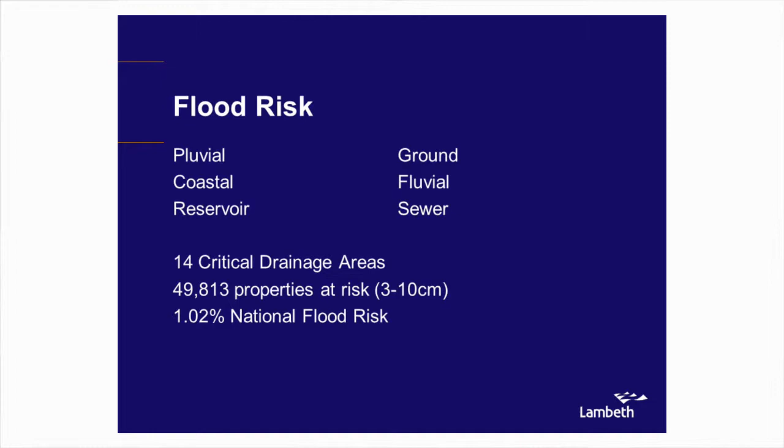We have identified through Drain London 14 critical drainage areas. Working on the map for surface water flooding, the Drain London outputs is about 49,000 properties, or 37% of properties in the borough. And on the DEFRA new burdens funding, we hold just over 1% of the national flood risk.

15% of our land use is public highway, and 17% of land use is green space and parks. So we have some option to do something, and that's the angle I'm looking at.

But first of all, I need to blame people, because politically I need to justify why I'm spending this over sewers. I can blame our friends at Thames.

It's all well and good David saying 1991, but it goes back further than that. The loss of front gardens - well, obviously I can blame my residents because they're being selfish with their vehicles and wanting to park on their front gardens and concrete them over.

Removal of grass verges, I put the 80s. We had some people who decided that concrete and asphalt was the way forward rather than grass and nice soft fluffy things.

Traffic calming, I put new Labour, so I'm just jumping on the bandwagon. Traffic calming to me was a massive success through the 10-year targets, and it was met and exceeded. It was great - we don't celebrate it enough.

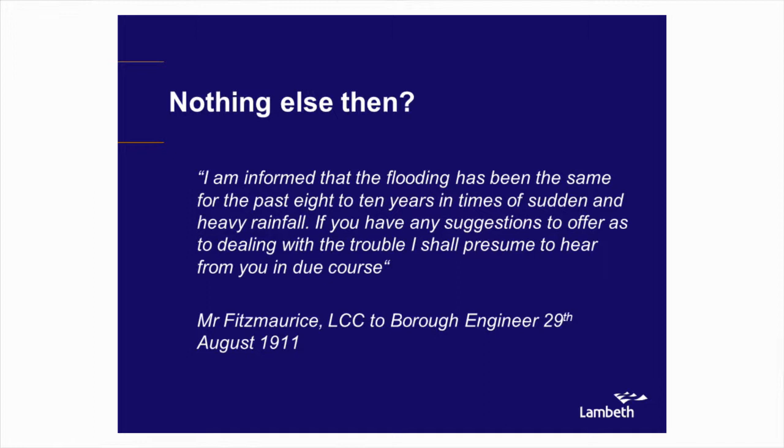Unfortunately, this was 1911, and that same problem still exists. So we haven't moved forward, and that was the old London County Council, which by definition is now Thames Water on the sewage side.

So I'm going to run through some schemes and what we're looking at. One thing I'm very keen on is maintenance schemes. We do these as bog standard - these are bread and butter, standard practice - we all have standard set designs of what we do in our roads.

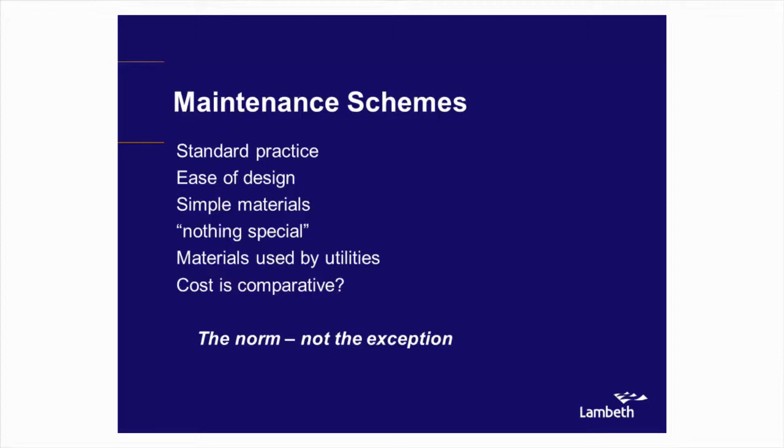We use straightforward materials, whether it's asphalt or small modular paving, and obviously they're materials which are identified and used by utility companies within the SROH. The cost is comparative - there's nothing special, it's the norm, not the exception. So we're not talking these lovely posh granite schemes, imported from China or wherever else it may be fashionable to import from.

So it's straightforward. Here I have Central Hill - planned maintenance to do the footway. It's on the principal road network, so it's an A road - gritted, bus routes, the usual sort of stuff.

Runs next to a park. We separate the public realm because that's what we like to do - there we have a park, there we have a highway, and never the twain shall meet. We have our crossfalls into the road for all footways, or the majority of footways are designed to fall into the road, and there is a little bit of a groundwater issue at the top of the hill.

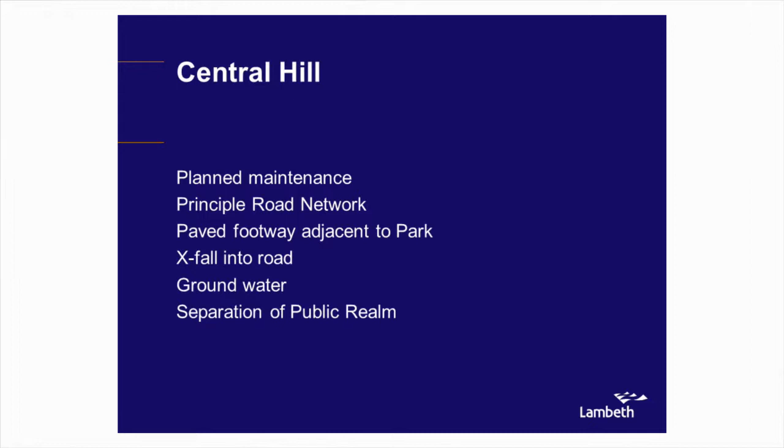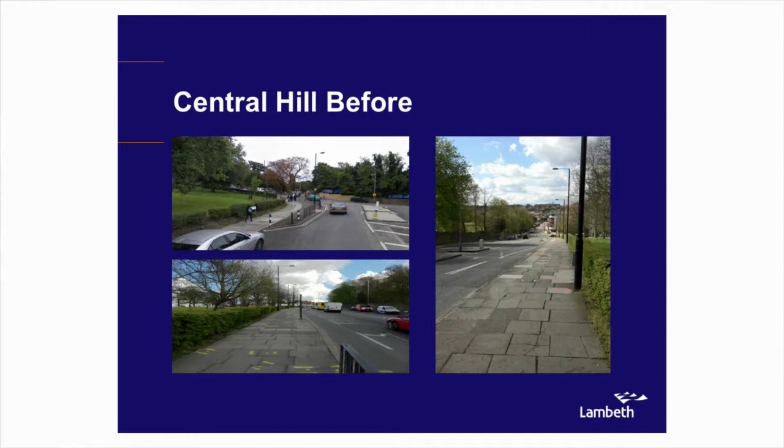So here we are. The top left is Ardlui Road at its junction with Central Hill. As you can see, a nice typical build out, guard railing, three different types of bollard I believe, and pretty much clutter - bog standard asphalt. The curb would have only just been chased into the existing carriageway, so the existing carriageway surface is still under that build out. The bottom left is looking up Central Hill, and the top and the right is looking down Central Hill, which is roughly where the groundwater issues are. They come out at the junction called Salters Hill.

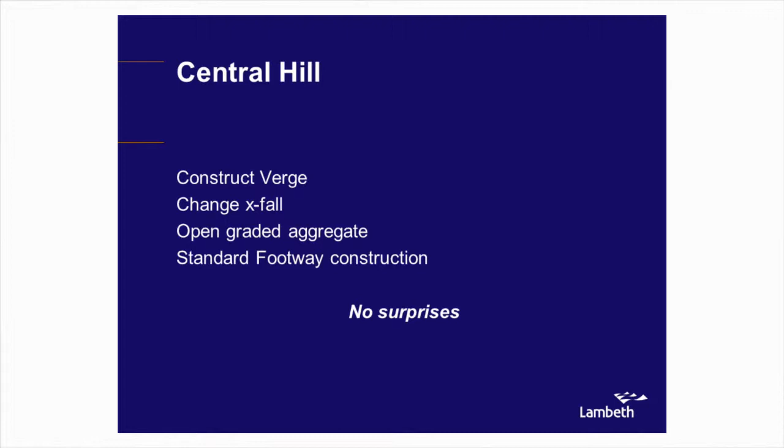The verge I've constructed, I've gone down 400s, I've used 200 of open graded aggregate. The reason I decided on that was purely because it's a material utilities use, or utilities can easily get hold of, so there's none of these arguments about, well, it's a special material, you need to provide it, etc. And the rest of it is just standard footway construction. It's nothing special.

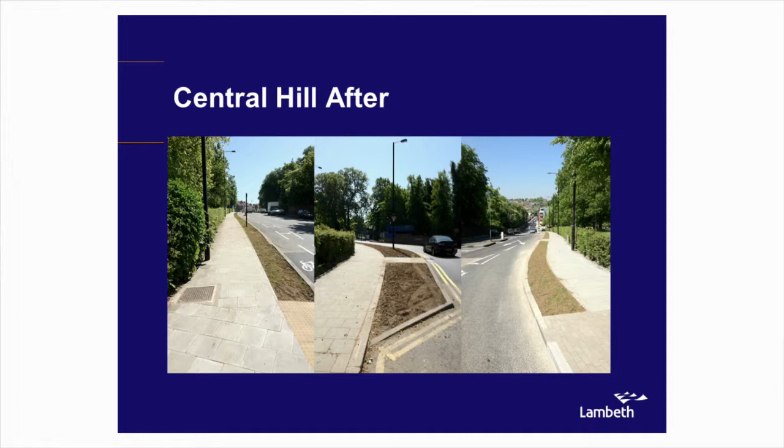This completed in May, and we've realised that I've made some mistakes on it. It's not perfect. We didn't realise there was an overrun issue, not on the build-out, but looking up the hill. Apparently Chelsea tractors like to park there, but there was no evidence on the old asphalt that people were parking up because it wasn't crazed or cracked.

We also didn't put any check barriers in - in retrospect we should have, and possibly a cut-off drain at the bottom of the build-out. On the grass verge and overrun, obviously the initial reaction of people at work was, well, we'll put bollards in, or we'll do something, or we can raise the curbs, and it just kind of loses the whole appeal and the object of what a grass verge is.

So Hydro are kindly humouring me at the moment, trying to find a solution of a possible grass verge which you can overrun without much damage and not using grasscrete. I know, I have a lot of aspirations.

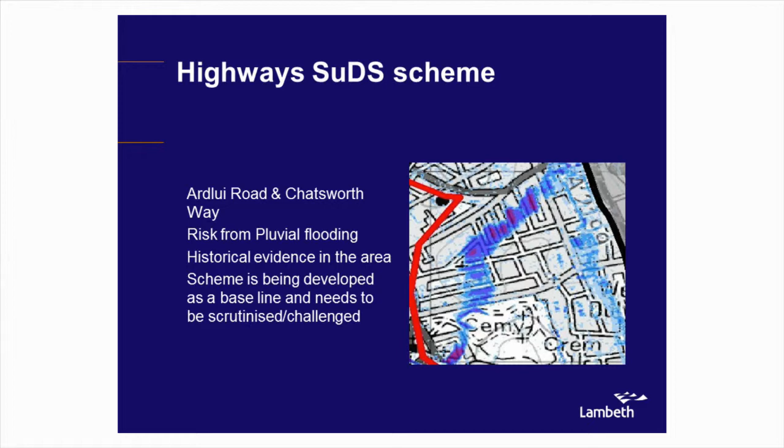It's a highway SuDS scheme we're doing. This is the one Steve Wilson mentioned. We picked two roads, or we're looking at two roads, Ardlui and Chatsworth. They're in that little triangle where the church is, or the cross is. And you can see the modelling, this Drain London output, that there's a pluvial risk, but we do actually have historical evidence in that area of properties being affected by surface water flooding.

It is being developed as a base. We are going into quite a lot of depth and detail on it and trying to capture a lot of detail. As I said, Steve's working on it. We've got URS who are working on the modelling and will write up the final report. And I've also commissioned Sustrans to lead on the community engagement.

So there's Ardlui. There's no frontage on Ardlui as it is. As you can see, it's just a road, but it's a dead space.

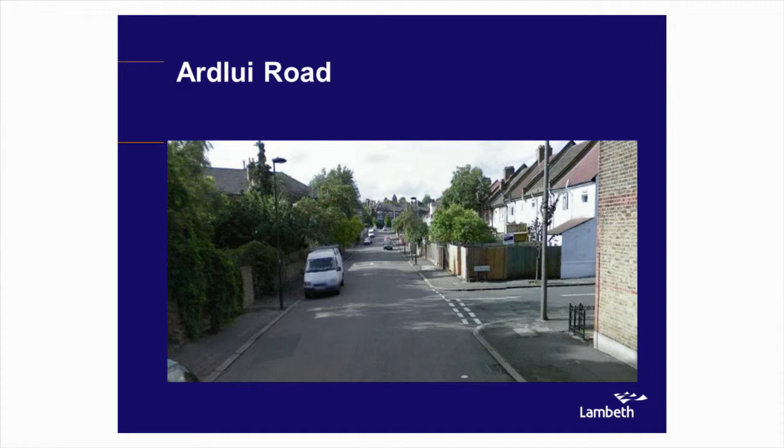Nothing much goes on there. So how do we bring that back into the public realm? Because that's what it is, public realm.

This is what Steve's kind of designed initially off the topo. The red lines are the build-outs Steve's put in, about 19 in both roads, which if we go for option 2, which I'll explain in a minute, it's probably about 50,000 litres.

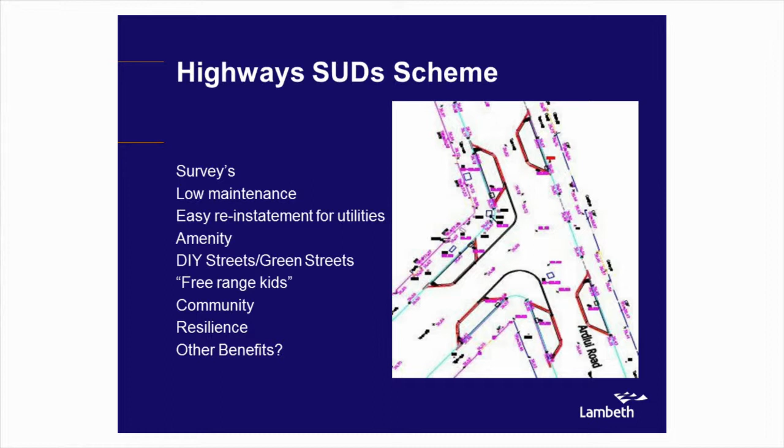It's got to be easy reinstatement for utilities because we don't want it ripped up. It's got to be low maintenance. Amenity is essential. Although these are more for extreme events, we need them to be spaces which can be enjoyed and part of. I've put it down as free range kids, which is a Sustrans livable neighbourhood thing. It's about kids enjoying the street again, playing footy out in the street like I used to, or trying to kick it at cars driving at you.

And we want to kind of bring in the Green Streets approach from Portland and the ownership issues from Seattle, and adopt a drain, hence Sustrans have this engagement process, which hopefully we can do. And it's going further on the resilience, looking to cut off downpipes, looking to depave front gardens and bring it back. So it's a door-to-door process, not fence to fence.

So I'm not solely keeping my eyes on the footway and carriageway. It's about space, it's about the community, it's about residents. We're trying to look at the property values, we're trying to look at health and well-being. How far we go with that, I don't know, but we're trying to get this data and break it down.

So the rain gardens, the size Steve's come up with, I said the size of the parking bay, because that's the size everyone can deal with. Everyone understands the size of a parking bay. So he's kind of doubled it.

This 5% figure is only a figure that's come up in the last week. I discussed it a couple of years ago, but I would be happy if I could get a 5% reduction in runoff. Doesn't sound like a lot, but when you start building these projects up over and over the area and the borough, it starts adding up.

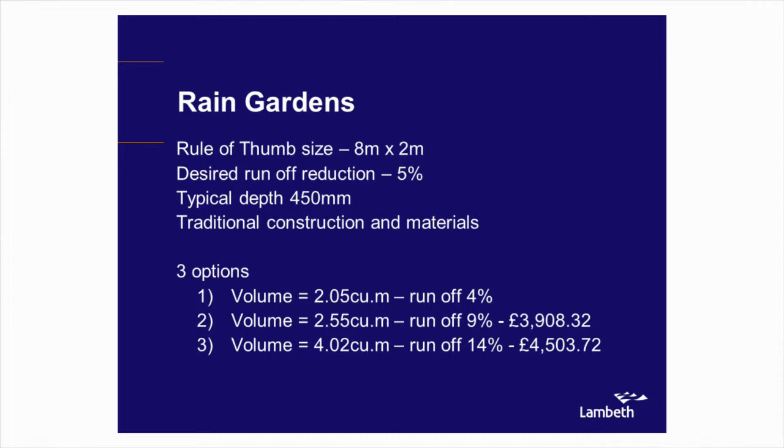And this is where the fun now starts, because option 3 is with the crates. It's got 4 cubic metres, as you can see, captures 14% runoff, and it's not that much more expensive. So now I'm getting into the realms of where do I want to go, what do I want to play with, and what is going to be more cost beneficial.

What happens if Thames Water come along and decide that they're going to lay their main there? Are they going to repair it? Do I have to store this stuff, etc., etc.? So we're beginning to get into the mechanics of the scheme. Here's another cross section, which is with the open graded.

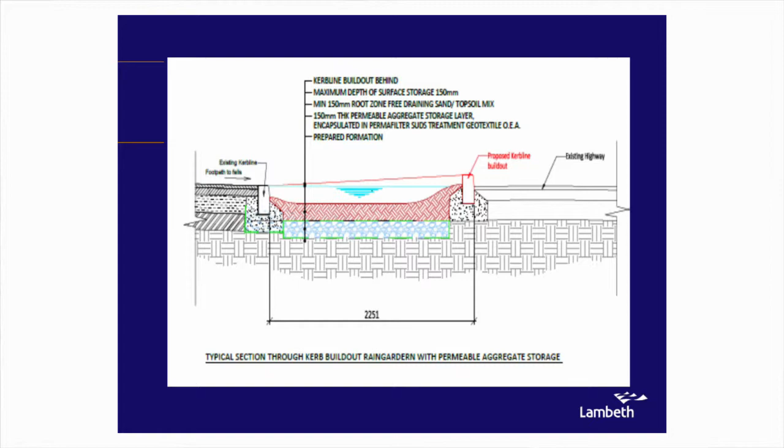Moving on, but going back to, we're looking to start consultation with residents, or engagement, in September. So hopefully be on site in February, or certainly if not, our contractors will dig a trial hole on the 31st of March. Ingleborough Street - this is a weird little stub end of road, as you can see.

I think this is our storage area for bollards in the borough—they run the whole length and no one knows why. We just know there are bollards there. This road services those properties on the right you can see in the photo, and that's pretty much it. Nothing much. Opposite is an estate, and there you go, a lovely bit of public realm—somewhere you'd all love to go, I'm sure.

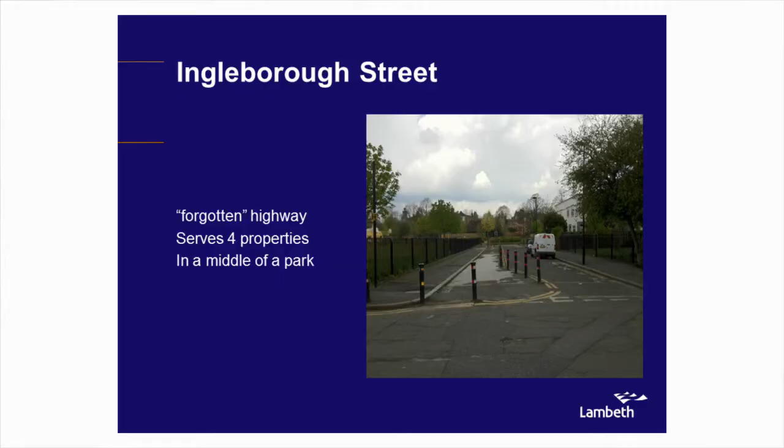On the left of the photo, you can see the two trees by the fence. What they're proposing to do is get rid of that grassed area and put in a hard standing football/basketball court area. And they thought, whilst they're going to do that, they could do something with that bit of road and take it into the park. Then they came to me and said, do you think you could do anything with it? I thought, well, yeah, why not?

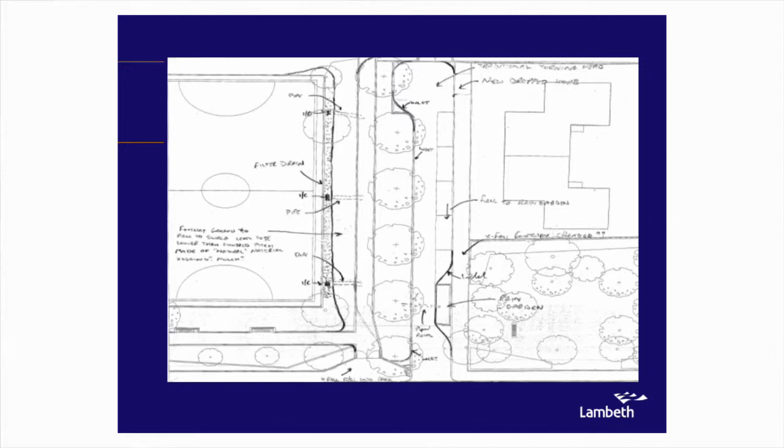So I'm only at concept stage, and it's just me having been on a train. But basically where the bollards are, I'm looking to move the kerb line over to where the bollards are—the fence will move there essentially. Move a path over, and where the football pitch is, it's just basically a massive swale, rain garden, whatever it is—an attenuation place where we can put water and take it off the road and off the park. So it becomes, I like to call it drainage neutral—it's probably not, but it's what we want. I just want to take it out of the system, hold it back from hitting the sewer. It's within a critical drainage area, one of our more serious ones.

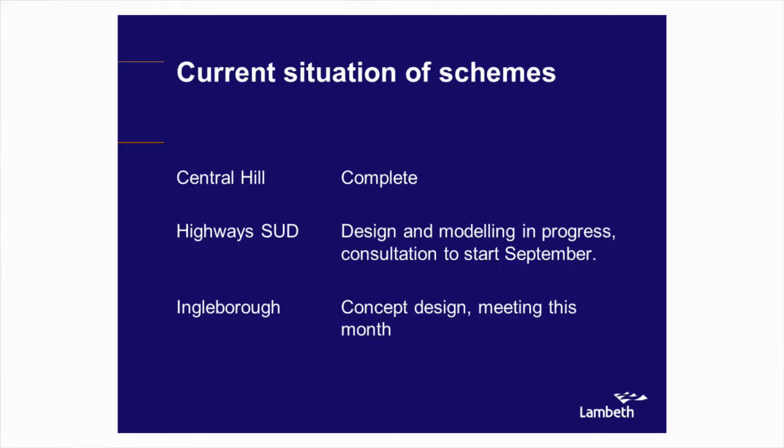So money's secured for that, so that will have to be delivered this financial year. Current status: Central Hill is complete. Highway SuDS design and modelling is in progress with Steve and URS. Hopefully consultation will start in September, if I can overcome the political hurdles. And Ingleborough, we've got a meeting with councillors and residents later this month.

Our opportunities—I'm a great one for opportunity. I like looking at the public highway and thinking, what could we do there? I've done a lot of stuff in the past, which is quite interesting. But Lambeth councillors have decided that the highways maintenance backlog is significant enough to undertake an investment programme, so it's looking like we're going to get 10 million extra money this year. I've gone through the footway list and identified 17 possible schemes. It's not guaranteed they'll definitely go ahead, but that's what I've identified at the moment.

So again, we're trying to integrate this whole maintenance, taking-it-forward approach, and obviously matching within the CDAs. Another opportunity: Isabel Street is a road which started off through the early surface water funding thing in 2009, which wasn't successful, but it moved forward under 106 funding. They started on site yesterday, apparently. However, two weeks ago I was asked into a meeting to look at whether we could put SuDS in, as the materials are being transported from China. So they're looking at that.

Old Town—this is in Clapham Old Town, where the buses stand, if anyone knows it—but it's a massive swathe of concrete. We're looking to make that a public space, but put a swale in one edge of it, just to enhance the public space and reduce runoff. Venn Street is finished—only a minor little thing, and again they humoured me, and I asked if the footways could be graded to the tree pits. So it's only a little thing, but it all adds up. The problem is the trees were olive trees, so I'm not sure that was the best thing.